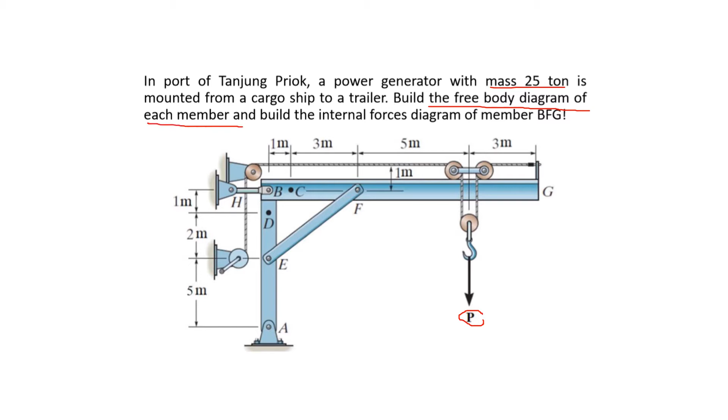Okay, today I want to discuss this question. So the question has P, which has a mass of 25 ton, and it asks us to build the free body diagram of each member and build the internal force diagram of member BFG.

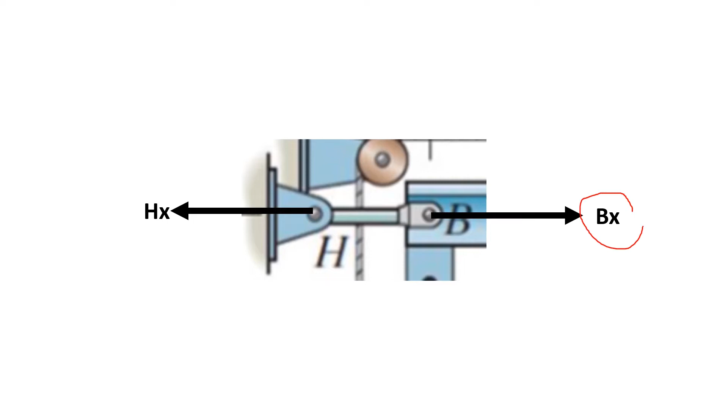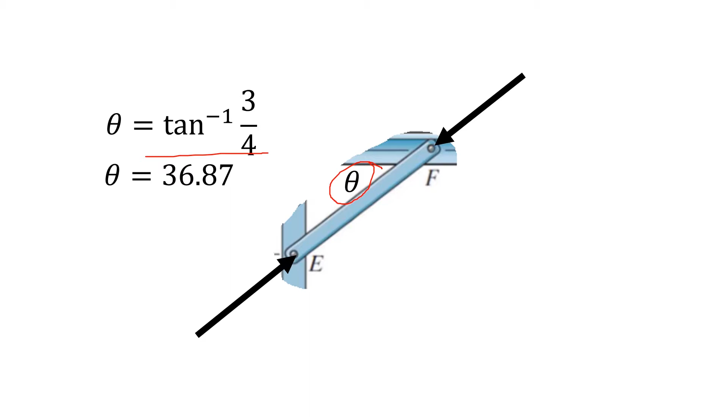So in here we have separated members, and the first member that we want to discuss is the HB member. HB is a two-force member, that's why there are only BX and HX forces in the axial. Next, let's see the free body diagram of EF. EF is also a two-force member, and here we have theta, which we can get from this equation. So we get theta is 36.87.

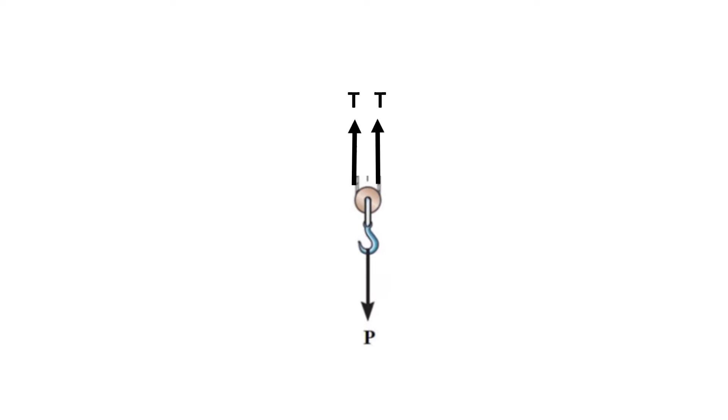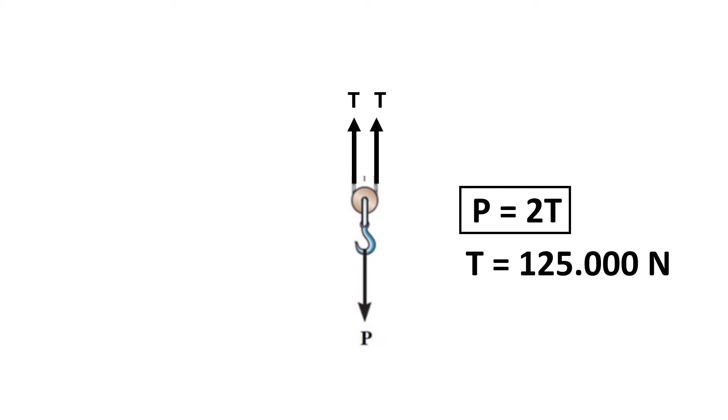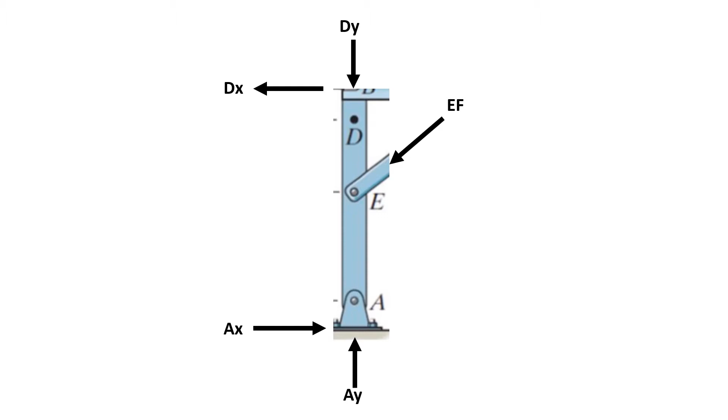Next, let's see the free body diagram of the pulley. In this free body diagram, we can conclude that P is equal to 2T. P itself is 25 ton, which is 250,000 Newton. So T is 125,000 Newton. Next, here is the free body diagram of member DA. And the last one is for member BG. So this is the free body diagram of member BG.

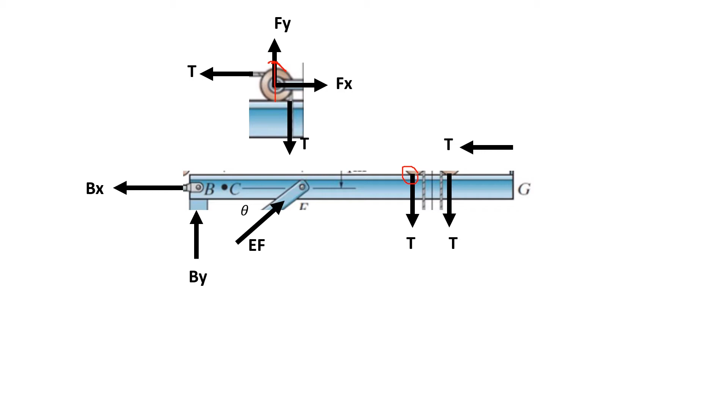Here we can see the free body diagram of the pulley. In here we can see that there is a normal force here, and it makes the force here act at the center of the pulley instead of this rope. By this calculation we can get EF and BY.

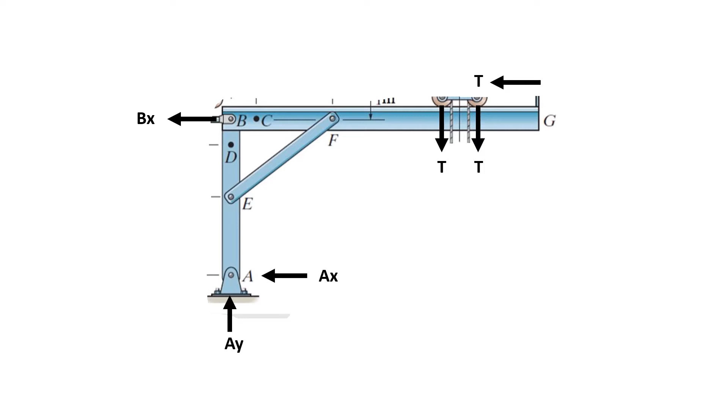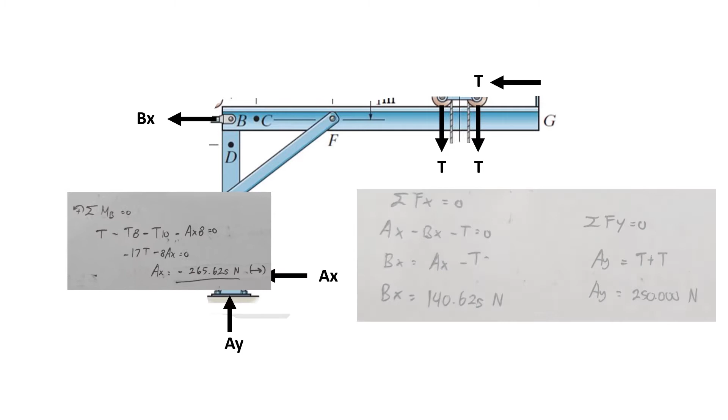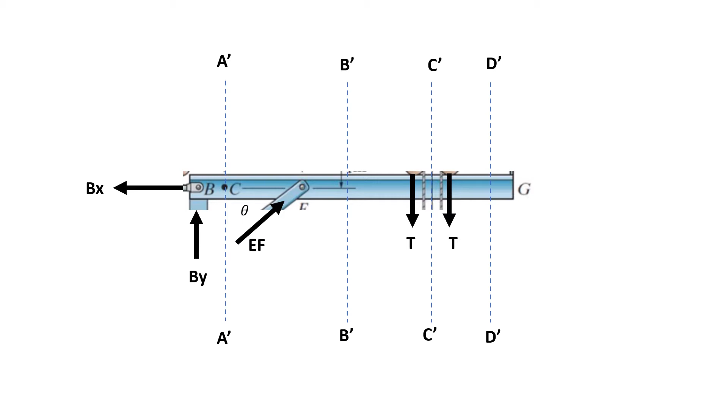Now let's calculate the structure from the external force. From this calculation we can get the AX here. Next, we can also get the BX and AY. After we get enough information, we need to draw the internal force diagram. So, let's divide the member into sections: Section A, Section B, Section C, and Section D.

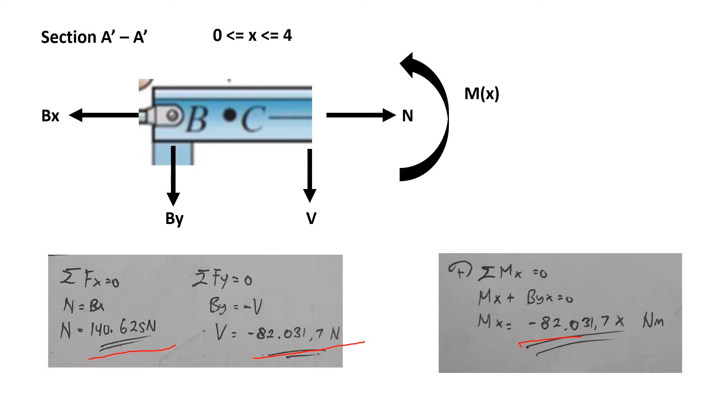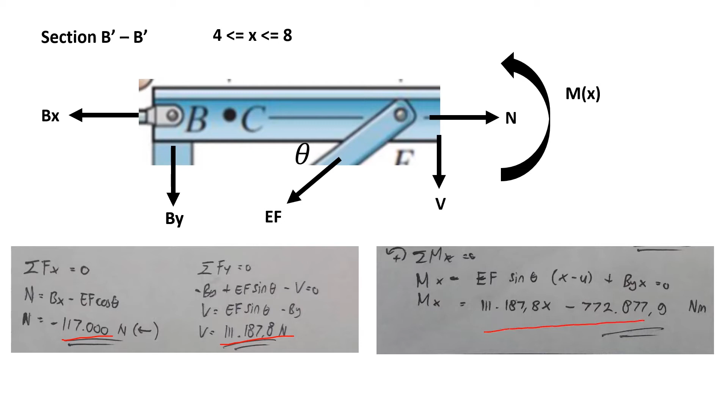The first section is Section A. So, from this free body diagram, we can get the normal force, the shear, and the moment equation. Next, this is the free body diagram of section B. And from this free body diagram, we can also get the normal force, the shear, and the moment equation.

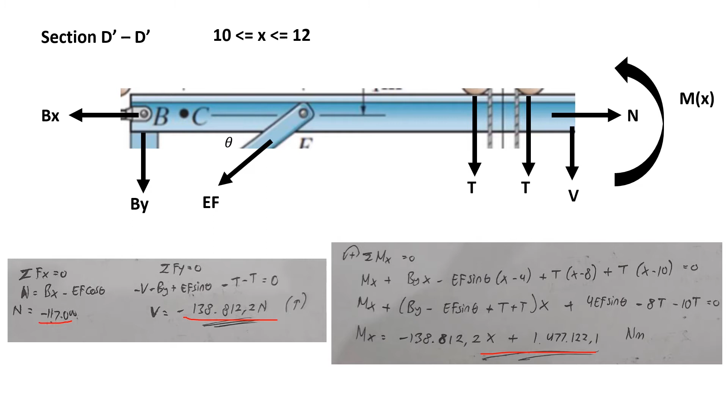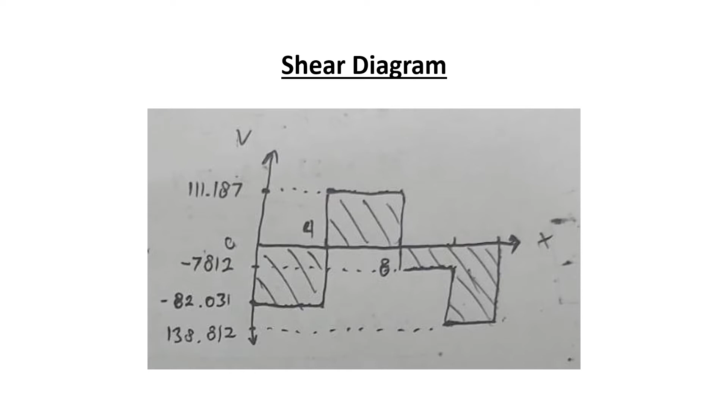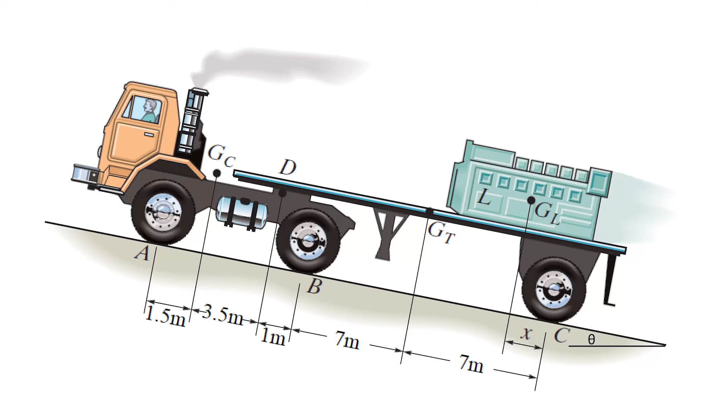So for problem number 2, we must find the minimum value of x so the truck can climb the hill without slipping. This is the problem picture. First, draw the free body diagram. After we draw the free body diagram, we can calculate the normal forces by using sigma Fy equal to 0. As you can see in our paperwork, there is a 6 because there are 6 tires on the truck. That means there will be 6 normal forces acting on the truck.

Then calculate it. We find the normal force is 57.73 Newton for each wheel. After we get the normal force on each tire, we must find the minimum value of x. We use the equation sigma moment about A equal to 0. Why sigma moment about A? Because when the sigma moment about A is equal to 0, the truck is about to slip, and then we will find the minimum value of x.

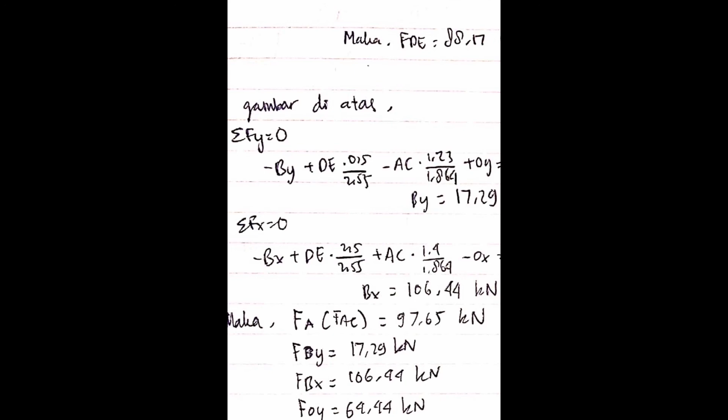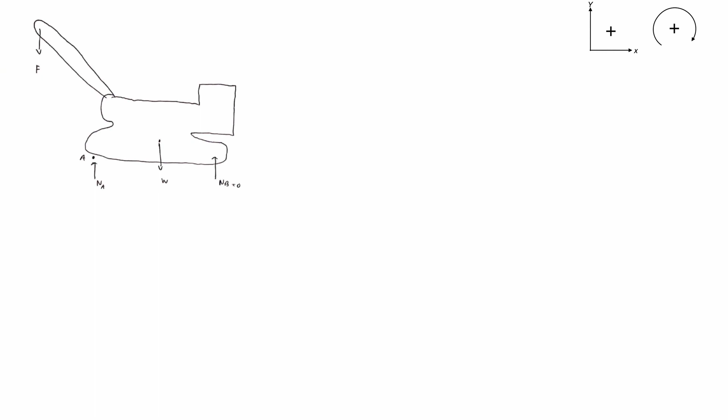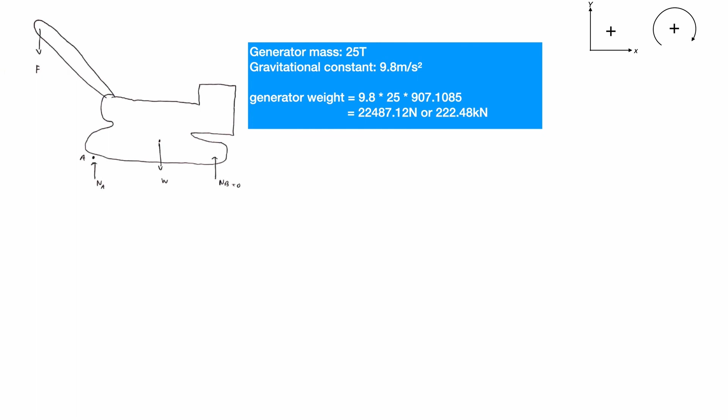The second step is to calculate the weight of the generator. The generator has a mass of 25 tons, and we start by converting it to kilograms and then multiplying that number by the gravitational constant. In this case, it is 9.8 meters per second squared. Next, we want to know the maximum length of the boom before the crane will tip over. To achieve this, the sigma moment of the system must be equal to 0.

First, we assume that clockwise rotation will give a positive result and vice versa, adding up all the moments caused by the weight of the crane itself and the generator. From the information provided, we can determine that the distance of the crane's weight is 2,597.5 mm, and the maximum distance of the generator is 2,597.5 mm plus x, where x is the distance from the tip of the crawler wheel to the generator's center of mass. By plugging in the numbers, we can calculate the value of x, which has a total value of 7,080.18 millimeters.

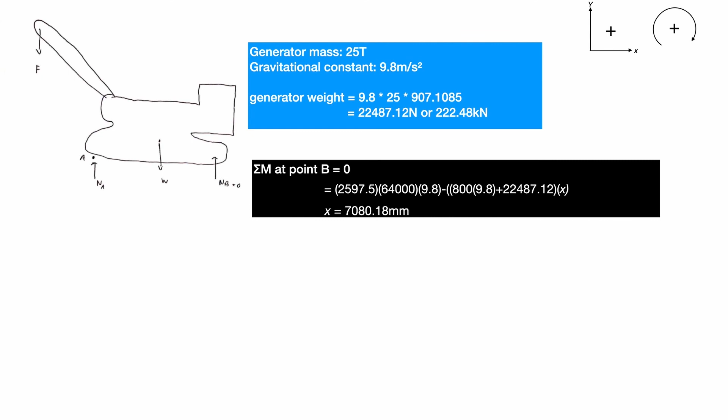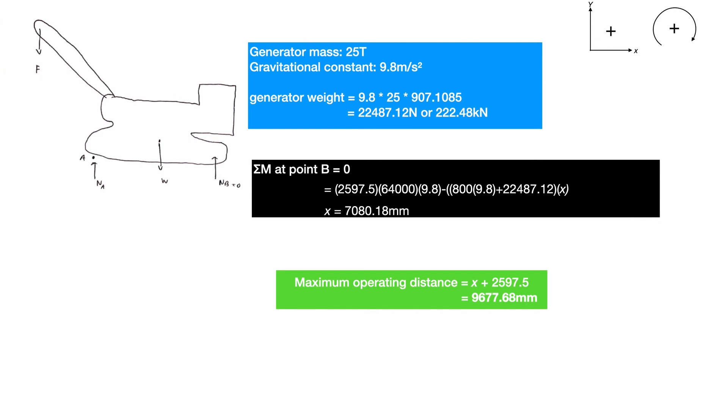We now know the distance between the tip of the track, represented here by point A, to the generator. Since the question is asking the distance between the generator and the crane's center of mass, all we have to do is add the distance between point A and W, which is given to be half of the overall length of the track. By adding these two values together, we have a final answer of 9,677.68 millimeters as the maximum operating radius of the crane.